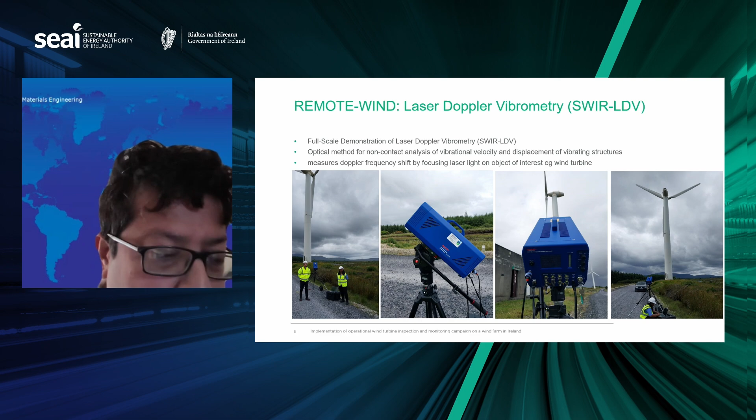To that extent, one of the things that we worked on was multi-point scanning laser Doppler vibrometer, where you can just put the Doppler vibrometer away from the turbine, perfectly non-contact. There's very little interaction with the turbine. You don't need to access it, so it's very safe, and get the vibrations. We also took monitoring from the inside of the tower with wireless accelerometers and on the nacelle.

Why? Because vibrations and movements and responses from a turbine, that links back to fundamentally its stiffness, and the stiffness links back to its health. Because if something gets weaker, it gets less stiff. And also if the boundaries start giving, you'll see that changing in the turbines.

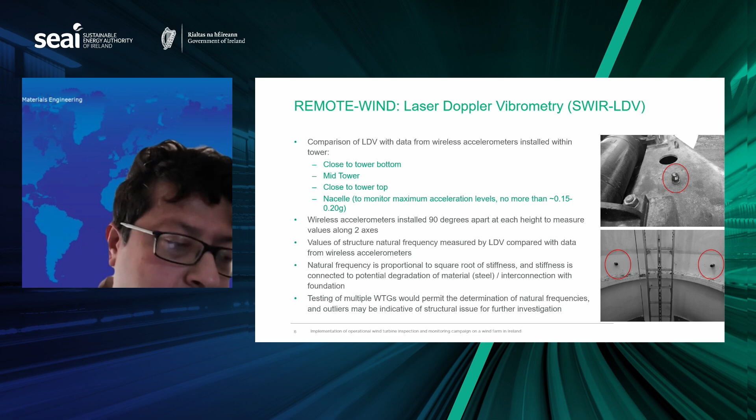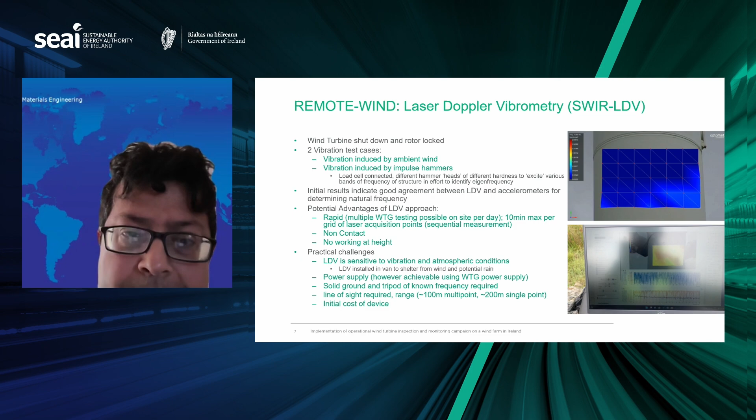What's important with these wireless multi-point Doppler vibrometries, and we actually have the only one right now here, is you can monitor many points at one go, and you can get the live response of its modal properties, of its natural frequencies, of its mode shapes, so on and so forth. That's actually very, very important and interesting to find out rapidly what's going on. Here's an example of us focusing directly close to the nacelle, and you can see that live we're getting from all these points what's going on with the turbine very rapidly.

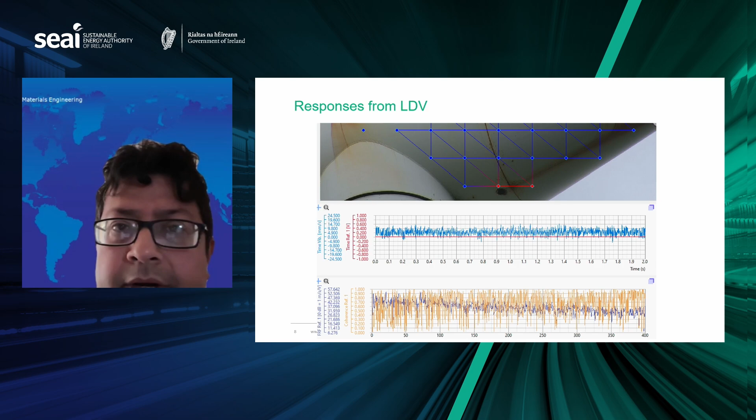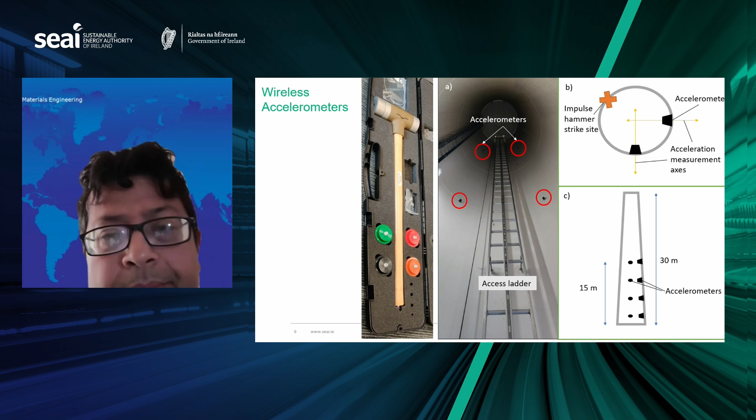That's very important. Similarly, we put wireless accelerometers all inside the turbine and excited it with the ambient vibration, which is the wind, but also with, you can see, this massive hammer. So these sledgehammers input controlled impulses to the tower without damaging anything, and we get both the inputs and the outputs. Then through various analysis and frequency responses, we find out some of the consistent peaks, which are then representative, they're markers of the health of the tower.

Similarly, after that, we carried out drone-based blade inspection because, as you know, edge erosion, that's linked to the performance of wind turbines, and also thermal imaging, which gives rise to the analysis of, okay, can we find out unknown cracks and everything. So the good news is they are doing fine pretty much.

Subsequently, we carried out lots of assessments which require some amount of contact or some amount of breakage in the whole system. To do that, we dug up the entire foundation of the wind farm, and we used GPRs, ground penetrating radars, and other techniques, for example, scanners, to find out what is the condition of the reinforcement inside. What is the condition of corrosion? How far has it degraded? Along with chemical analysis and strengths.

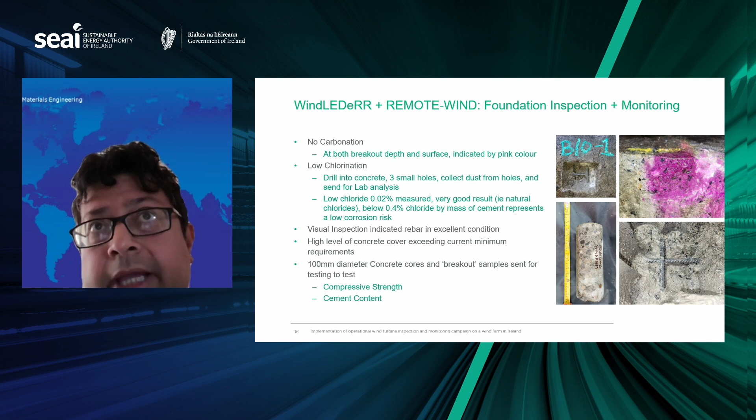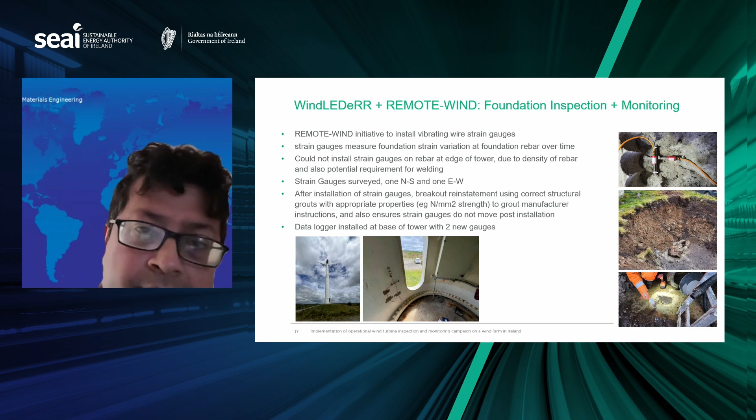So the cover is fine, the strengths are doing fine, and it has been taken good care of. There is some onset of corrosion, but it's also at the end of its life, so it's fine. What happens after this right now? So we have started long-term monitoring of these towers. Here's an example where monitoring of the foundation underneath and also in the tower. It's very unique. We have started that for a very long time. We're talking about more than a year that we're going to do it for now.

And that will give us a lot of insight into how wind turbines behave, what their health is, and what we can do in future to implement this all over the country. So this is a national reference project, and I'm very happy to have been leading it. Thank you.

And now I'd like to welcome Divyanshu Sood. And if you can introduce yourself and tell us a bit about your presentation. Yeah. So hi everyone. I hope you can hear me clearly. So my name is Divyanshu, and I am a PhD student in the School of Mechanical Engineering at UCD. So I am working with James O'Donnell in his laboratory, building information modeling.

So today I will be talking about the project which I am a part of as a PhD student. The project is ALIVE, which is assessing the indoor environmental quality, IEQ, and energy efficiency in naturally ventilated buildings which are energy efficient as well. So this project is funded by the SEAI, and I'm working with James O'Donnell in this project at UCD. So today I will talk about what exactly the project is, what are the learnings which we got from this project, how this project will help policy making and decision making, and what is our vision for 2050.

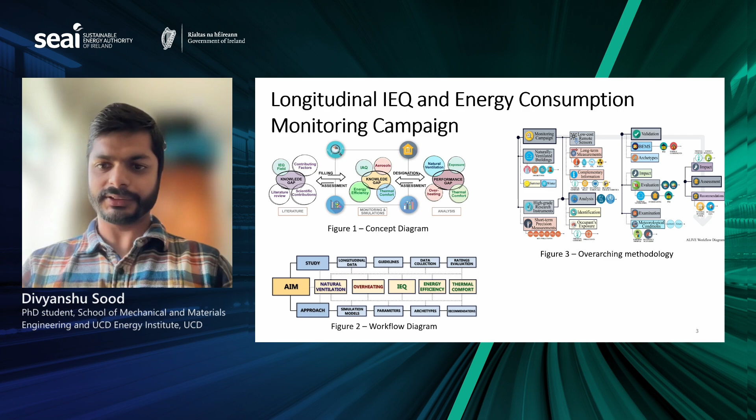Once we have the data, we analyzed the data and used that data to develop residential building archetypes, so that we can develop machine learning models to predict energy consumption and IEQ at the same time. And this data, which we collected using the sensors, was used to validate our estimation results.

And this is the setup which we use. So the first image in figure 4 is the low grade sensors which we installed in the houses for a period of 1 year. The figure in the middle is the high grade sensors which are used to validate the low grade sensors, and figure C is the energy sensor which we installed on the meter that is capturing the energy consumption data at 10 minute intervals.

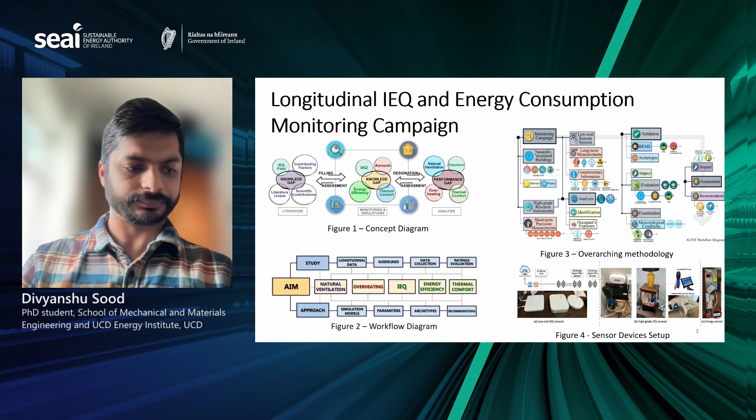So the learnings from this analysis. First is the indoor environmental quality analysis based on the sensors. Approximately for a year, from 16 houses across Ireland, we collected approximately 40 million data points, which is quite a big data set for our analysis. We found out that the IEQ levels are governed by the occupant behavior. So it's not always whether we have proper ventilation or not. It is also the activities which humans do in residential buildings that impact the indoor environmental quality and the energy consumption. The CO2 data collected from the sensors can be a good proxy for occupancy presence in the dwellings.

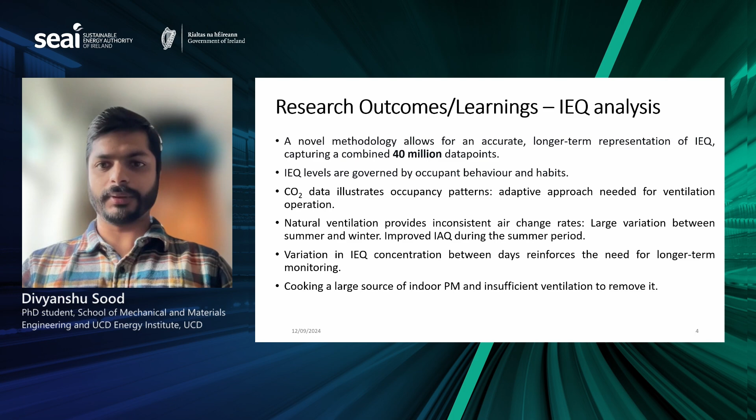And natural ventilation provides very inconsistent air change rates. Again, it depends on how occupants utilize natural ventilation by opening or closing the windows, so that they have a thermally comfortable indoor environment. And there are large variations in IEQ between the summer period and the winter period. And cooking is the largest source of indoor PM2.5, and this is basically due to insufficient ventilation during those times.

Now, when we have all this IEQ data and the sensor data, we use the residential building archetypes to model these, so that we can predict the results using the models, because we cannot have these sensors all the time in the buildings. But to accurately measure the results, first we developed the occupancy models, as occupancy has the highest uncertainty when it comes to energy consumption and IEQ. So two types of models are developed: a deterministic model and a probabilistic model. And then these are used for the multi-scale energy analysis. Then we also developed the meta model based optimization to predict and optimize at the same time, and it reduces the optimization time by approximately 80% with an accuracy of 98%.

So now, how does this help in policy making? This study focuses on occupancy behavior and combined energy and IEQ analysis. So this will help in updating the standards so they match the real world values. And the meta model based analysis helps in identifying the performance of various retrofit scenarios very quickly. And these will support the development of robust energy policies which consider both energy consumption and the thermal comfort of the occupants at the same time.

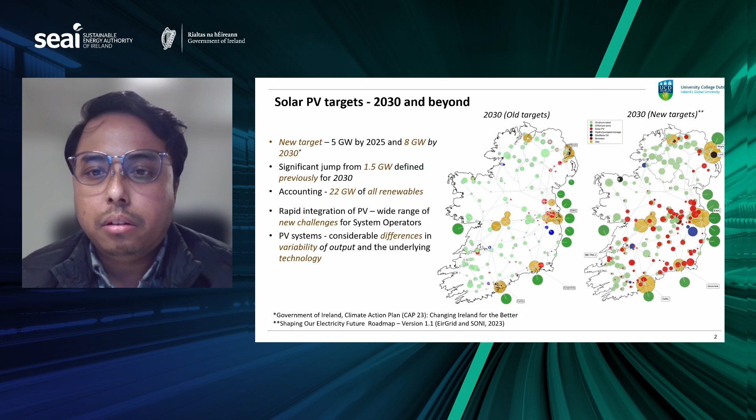In the figure also, we can see the amount of solar PV generation shown here in the red dots. The difference in the amount, and also the location, is quite important here, because most of these solar generations are coming in on the east coast and the southern part of Ireland, whereas currently we have a lot of wind generation on the west coast, and that is going to create a lot of new challenges for the rapid, large-scale integration of PV systems. One important thing to consider is the differences in the overall generation profile of PV, and the technology involved in this type of generation.

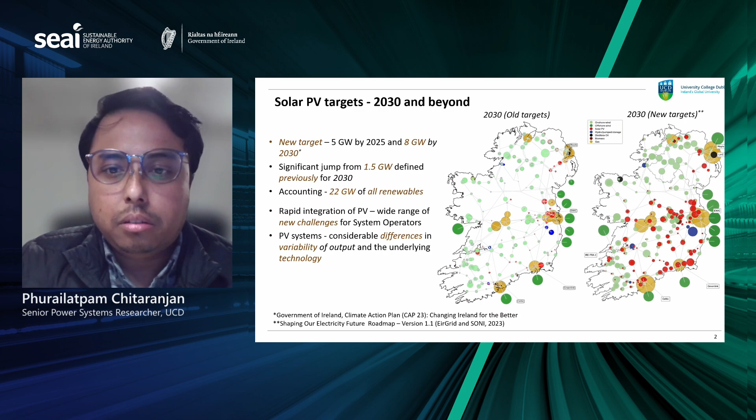So here, we are classifying the challenges in terms of system level challenges and regional challenges. If you look at the system level challenges, we are looking at multiple things here: balancing, frequency control, stability, dispatch down of renewable energy sources that is to be maintained at around 7%. These sources like PV or wind do not provide any system service provision. Specific to PV, we have the problem of spatial and temporal variation of PV output, the ramping effects that I just talked about, and also the possibility of having low wind and low PV at the same time. So those are some of the system level challenges.

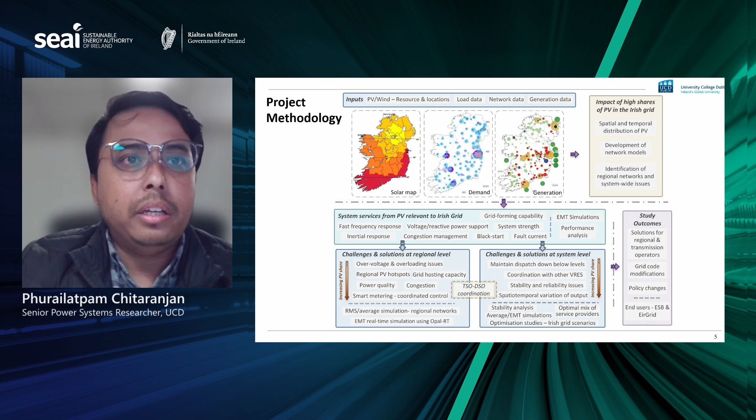So coming to the current work of optimization and simulation, we have just started off this project very recently. So currently we are still starting off with a few of the optimization work and some simulation that are currently planned.

So if you look at the optimization model, first of all, we are looking at developing or getting regional time series data that will go into the optimization model that has a unit commitment with operational constraint and contingency screening that can give a representative result that is shown over here for the winter and summer months, showing you the curtailments at various regions of the Irish network.

For the simulation model, we are looking at starting off with something like the dynamic system model that is shown over here. That is the single frequency model, where we get the input from the optimization model in terms of dispatch and in terms of commitment to be fed into the EMT models of the thermal generations or different renewable energy sources. They are used to create this simulation model for various analysis.

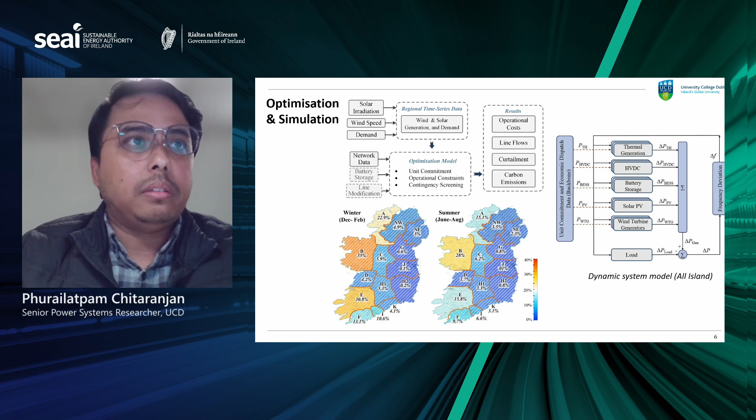Yeah, if you can come to your conclusions, that would be great.

Thank you. So the overall objective is a comprehensive approach to identify Ireland-specific problems and solutions for 2030 and beyond. And at the system level, we're looking at stability, maintaining dispatch down, optimize economic solutions. At a regional level, we are looking at maintaining headroom for rapid and continuous uptake of PV, looking into 2025, 2030 and beyond.

The solutions looking ahead to 2050, we have advanced solutions such as grid forming capability, providing system strength, like black start capability, fault current injection, and we are looking at a little bit more detailed EMT simulations of networks and components with various softwares, etc.

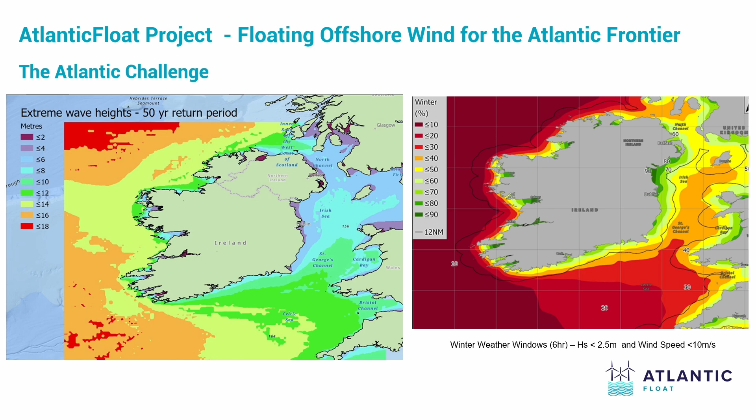So if you want to get out to an offshore platform in the winter time, this shows that you'll get a 6-hour weather window with a wave height less than 2.5 meters about 10% of the time. So you have very little opportunity to do things offshore in the winter. So you must design your technology and your logistics and your methodologies to be able to work in this environment. And that's the challenge we have, and that's what the project is addressing.

So just to say what we're doing in the project, we're looking at different floating technologies, and we're modeling them in a laboratory environment at the Lir National Ocean Test Facility, and doing it numerically as well. So the main platform that's being used at the moment is called a semi-submersible. So we're taking generic designs for a semi-submersible and a TLP, which is a tension leg platform, and then we're identifying and measuring how they behave in Atlantic environments, and then, based on what we get, we'll design a new platform.

So part of the project is to design new technologies that will be able to survive and operate in Atlantic environments. And that's what 2 of our industry partners are doing. Rockall Research are designing a stable offshore floating wind platform called SOFWind, particularly for Atlantic environments.

And that's a picture of it, and if you look at the picture there on the right, that's it being tested already in the Lir National Ocean Test Facility. And then Dublin Offshore are developing this mooring system, or component of the mooring system, called the LRD, and we're incorporating that into it as well. So they're the main things coming out of the project.

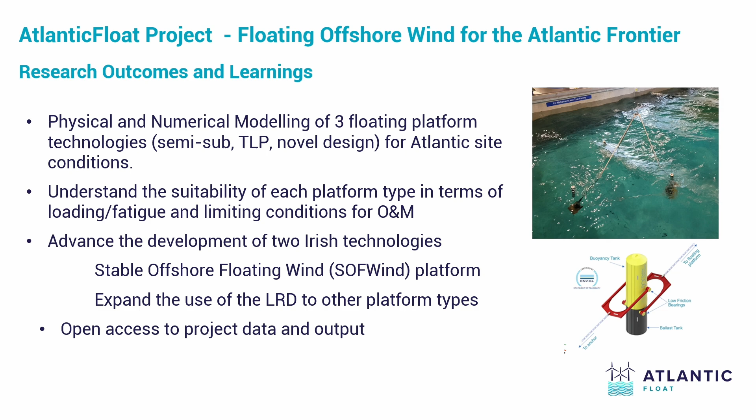We're identifying behavior of technologies in ocean environments, and then developing solutions for it. So just how we'll inform policy, and the benefits of the project is we'll identify the readiness and challenges related to development of floating wind farms in Atlantic sites. This may influence the timeline and site locations for the first floating wind farms in Ireland. I know there's a push for wind farms, particularly along the west coast, floating wind, but my view at the moment is that we're not ready for it yet.

And the project as well, if you look at the second bullet point, is that we'll have more information on the behavior of technology offshore in terms of failure rates and loadings and things. So we'll be able to give more reliable estimates of the levelized cost of energy for floating wind in extreme environments. And also, because we're developing new technologies, we're contributing to development of the Irish supply chain, and also providing data and knowledge to the sector in general.

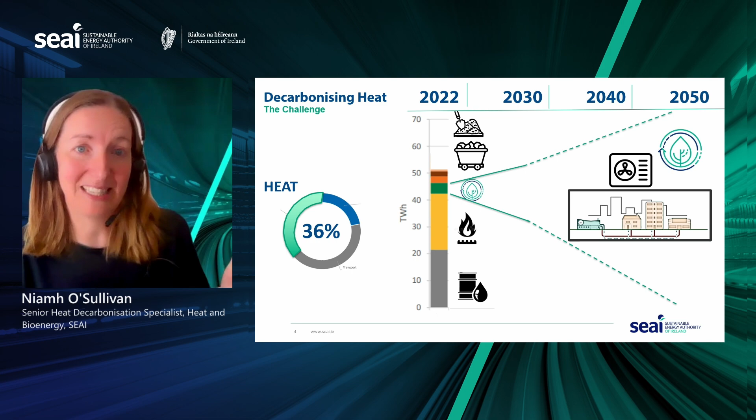It simply involves heating hot water at a central location and distributing that by insulated pipes to homes and buildings, where it interfaces with your heating system. So instead of burning gas or oil in your home, you would receive this hot water and then draw down that heat. So we know that district heating is one key area, and this is where SEAI has decided to focus some of our research in recent times. And we've done two significant projects that I'll just touch on today.

It really involves, if you consider the funnel of projects that we need to deploy. The target that's set for 2030 is 2.7 terawatt hours. And that equates to around 100,000 buildings being connected by 2030, which is a big number. It's about 90,000 residential and 10,000 public sector and commercial.

The second thing, if you want to narrow that funnel even further: you've identified an area that might be viable, you've got an idea. How do you then test if it's viable, has merit and is worthy of further investigation? This is where you'd undertake a feasibility study. And SEAI has undertaken research with Codema looking at international best practice and developing a standardised assessment approach and methodology.

And I suppose the idea being that you could rapidly screen potential projects to see whether or not they will be worthy of further investigation and further work. So if you could imagine, if you just take a big step back, we might need 100 projects across the country. That might mean you might need 300 feasibility studies, and you need them to be done rapidly and at scale and to a similar standard.

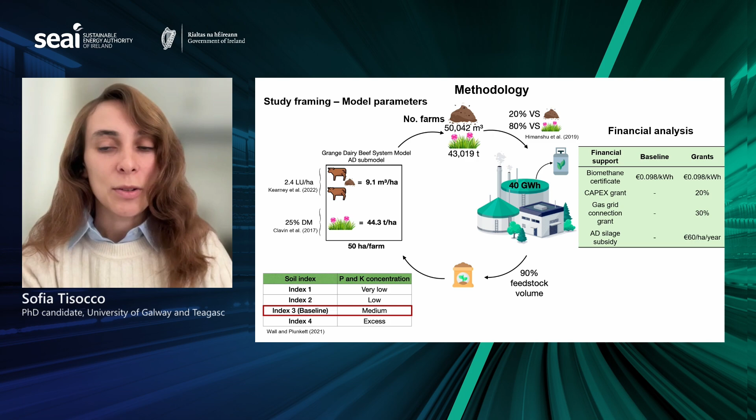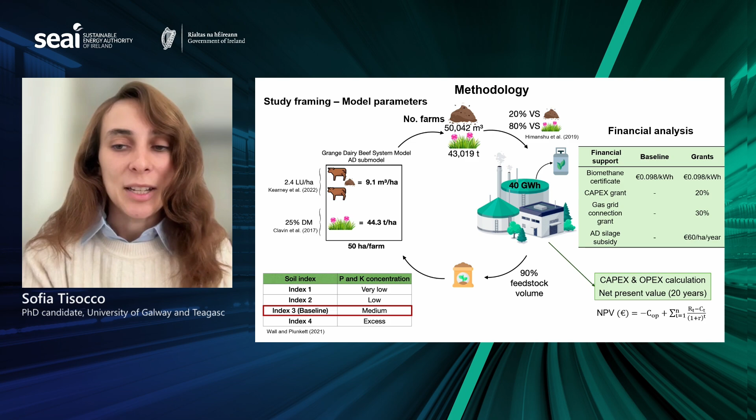And then digestate was assumed to be returned into the farms providing the feedstock, and a soil index of 3, which is considered a soil index which has medium to optimal concentration of phosphorus and potassium in the soil, was considered. So in terms of the financial analysis, 2 scenarios were considered: a baseline scenario, in which the plant only had the biomethane certificate as a potential support, and a grant scenario in which the plant contained the biomethane certificate as well as capital cost grants, gas grid connection grants, and a silage subsidy to establish the grass silage crop. And then capital and operational expenditures were calculated for the AD plant, as well as the net present value over a 20 years project lifespan.

So as a bit of the results, the AD farm configurations, it was found that 85% of each farm would have to be dedicated to have livestock to produce the slurry for the AD plant, whereas the remaining 15% would be dedicated to grow grass silage for the AD. And if we have 130 farms with this same configuration, we will reach the annual feedstock demand by the AD plant. And as for greenhouse gas emissions, at a farm level, it was found that greenhouse gas emissions could be reduced by up to 24% if 15% of the land is dedicated to grow grass silage for AD.

And in terms of the digestate, we found that returning digestate back to the farms reduced the chemical nitrogen, phosphorus, and potassium application by up to 65, 33, and 56% respectively. So as for the financial analysis, looking at the net present value over 20 years, it was found that neither of the scenarios investigated led to an attractive financial situation.

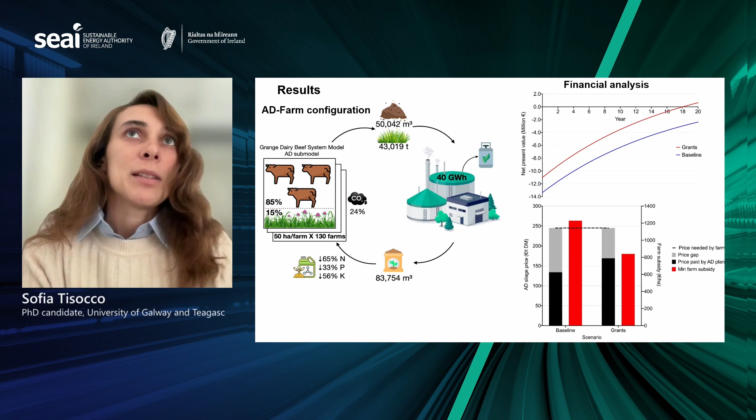So a further scenario was analyzed. A further analysis was carried out, and this included what is the maximum price that the AD plant can pay for grass silage in order to achieve an attractive financial situation. Here is the black bar, the maximum price that the plant can afford, and the price gap between the maximum price that the AD plant can afford and the grass silage price needed would have to be compensated through farm subsidies. The price in this study that the farm would need to make this an attractive business for the farm was €245 per ton of dry matter of grass silage.

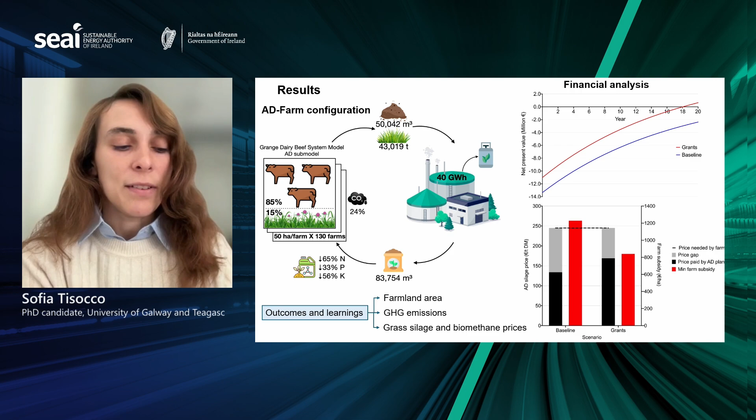So a bit of outcomes of this research. We looked into the farmland area required to produce feedstock for a full-scale plant, the greenhouse gas emissions at farm and supply chain scale, and in the economic part, what grass silage price is needed, and what biomethane certificate price is needed to make all this financially viable.

So the impact of this research on policy making and energy future. This research impacts different sectors, starting from the farms. It provides information about how farms can diversify by producing grass silage, and the economic numbers that would make this feasible. For the industry, it looks at the biomethane certificate prices the industry would need to make this financially viable. And most importantly, it provides information for policymakers so they can provide adequate incentive and support mechanisms for the sectors involved. The bigger picture is Ireland working towards a sustainable and low carbon agricultural sector and energy future.

So last, my vision of the research. I see all these as a combination of different gears that are moving together and they need each other to move. The research outputs is the one that I'm part of. As a PhD researcher I'm generating information, but to do research I also need data and results from previous colleagues that have been working in the area. So I highlight the importance of collaboration, of engagement, of knowing what other research groups are doing to see if they can complement your research.

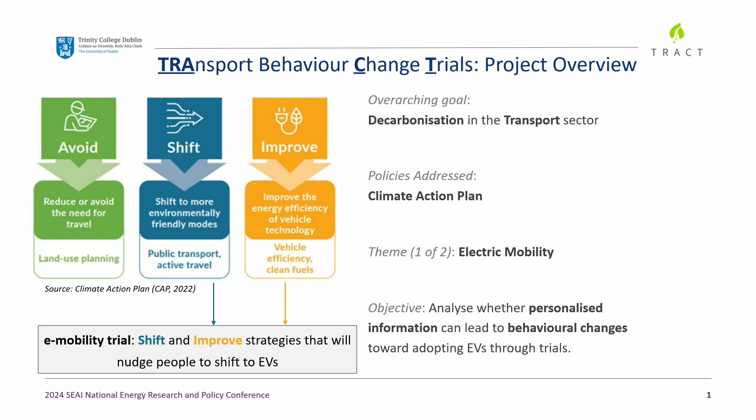And the objective of this piece of work that I'm sharing today is that we have developed an app called TRACT EV. It's a smartphone application that is available on both Android as well as the Apple Store. And the trial is going on right now. So the idea is to actually see whether personalized information can lead to behavioral changes towards EVs, because we have seen a lot of miscommunication and misconceptions about EVs in the market. So you are all aware of the avoid, shift, improve policies. So we are targeting the shift and improve aspects of it through trialing.

So if I just go to the basic structure of the app, what we are trying to do is we are capturing the socio-demographics of the user at the time of registration, and then we are taking some vehicle details that the user is driving, and details such as motor tax. And we are also capturing the likelihood to switch to an EV, the preconceived notion, from the user. That's all the user has to do. After that, everything is done in the background.

We are fetching a lot of variables within the app, such as the user's driving distance, which is automatically fetched by the app, and we are continuously updating the rates of fuel, such as petrol and diesel. We are taking the consumption values from the motor tax document and also the emission factors from there. And after that, in the background we're calculating the weekly costs as well as annual costs. In weekly costs, we're only considering the running cost. In annual cost, we're considering running costs, maintenance cost, and the other costs as well. And we have taken measures so that it is very much related to real world scenarios. And once the costs are calculated, they are compared with a standard EV.

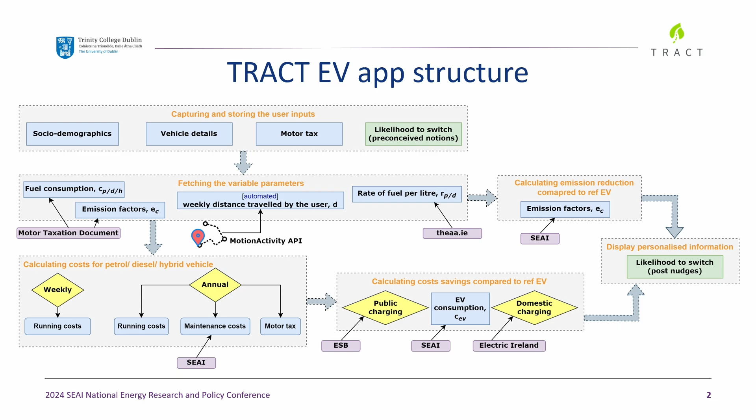And the same, the other scenario we are doing for domestic charging. What if the person is using domestic chargers? So the whole information is displayed on the user's app, and then we are trying to capture whether the behavior, whether the perception towards an EV has changed or not.

And we are also recommending the range that would suffice the user's needs. And all these values are tailored to the user's needs. So that means every user will have different kind of information displayed on their screens when they're using the app.

Talking about the app, we are targeting 5 use cases, and most of these have shown very little uptake of EVs. Say, for example, a rural population and those without driveways. So we are focusing on all these use cases as well.

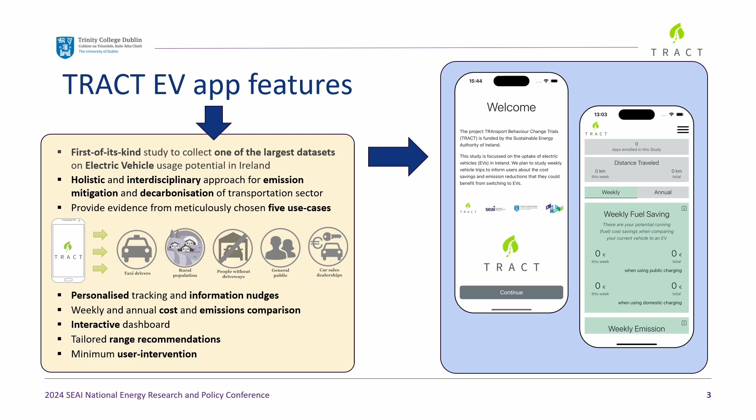Talking about the policy perspectives, I will just come to the future directions because I have very little time left. So we need to optimize EV adoption through evidence-based solutions. That's very important. And then we need to see that we shift towards cleaner transportation systems. And if I talk about the sustainability pyramid, the electric car is not on the top. So we need to look for intermodal solutions, taking all the aspects into consideration. And of course, we need to think about sustainable energy and sustainable transportation in a larger picture.